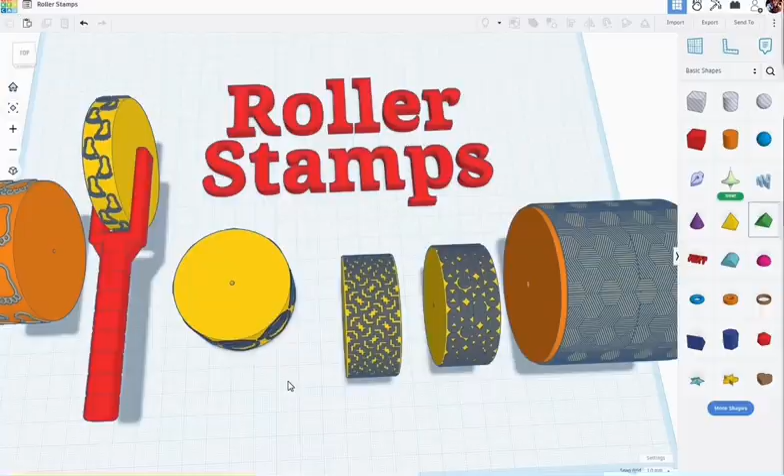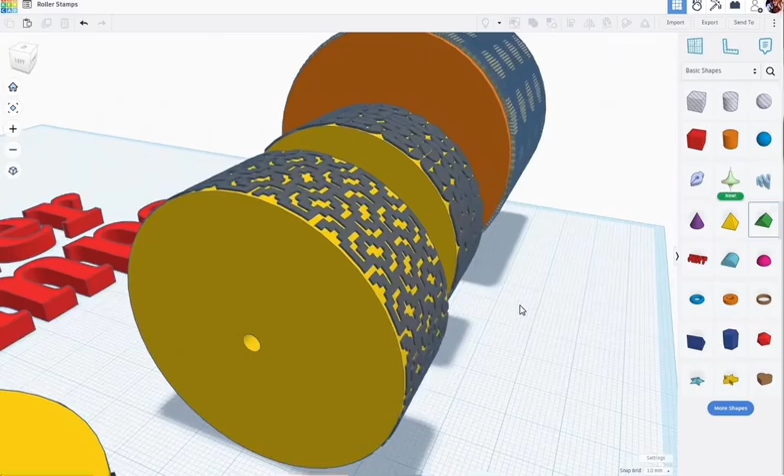This is part 3 in my roller stamps tutorials. In the prior two tutorials, I showed you how to make these roller stamps using simple images from Google, like footprints and Santa. But I said I'd also show you how to do these seamless type images, so let's get started on that.

Let's close this one and open up a clean workspace so it's a little easier to do this in TinkerCAD. On my workspace here, I'm going to click on Create, 3D Design. We'll open up a new workspace. Here we have it. Now let's jump over to Google.

One thing to note on this type of roller stamp design is that we want to work with images that are considered seamless, meaning if you put it edge to edge or top to bottom, everything will line up. It's also a good idea to pick an image with more straight lines and squares, not so much circles. If you've worked with TinkerCAD before, you'll know the more faces or facets in the mesh, the more difficult it is for TinkerCAD to render or group our projects.

So I found this one here - I went to Google, put in seamless textured clip art, black and white, and found this great image. I'm going to right click on it, say Save Image As. It's an SVG, and I'll save it back to my PC.

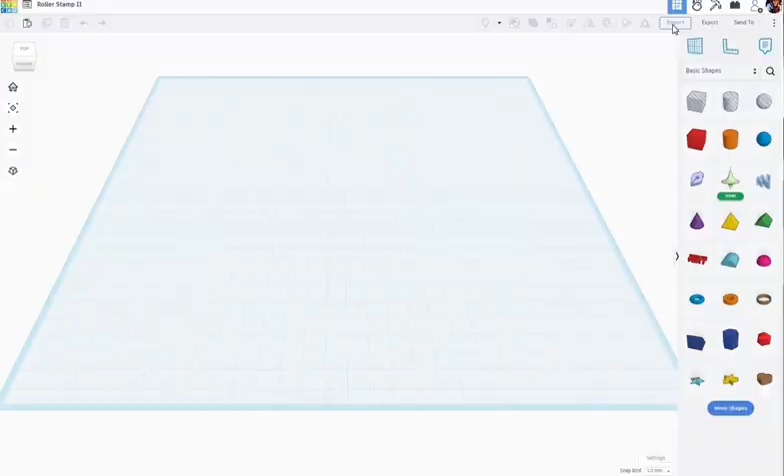Click on Save. Let's jump back to TinkerCAD here. Now let's give our project a name - let's call this Roller Stamp 2. I'm going to click on Import, choose a file. There's our SVG. I'll click on Open.

I'm going to select Art. Now this is pretty huge, so I'll go ahead and scale this down to just 10%. Click on Import, we'll give that a moment to bring it in, and when it comes in, it's going to look like this.

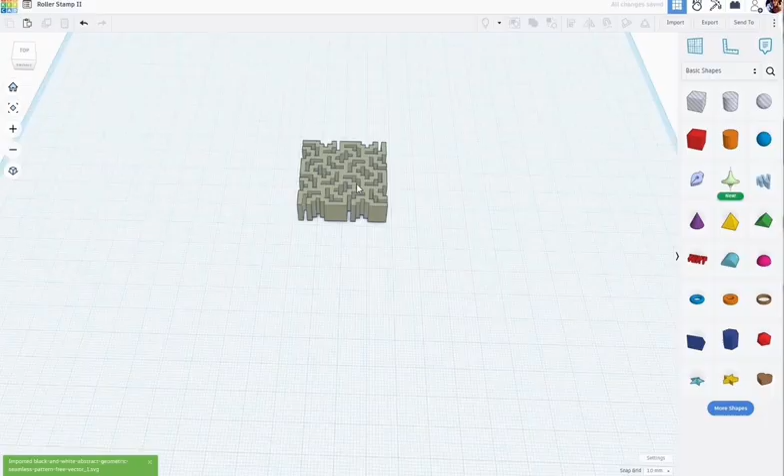Let's go ahead and change the color of this - let's make it a gray color here. Now I'm going to hold down my Shift key and roll this over this way, and I'm also going to rotate it this direction. D to drop it to the work plane.

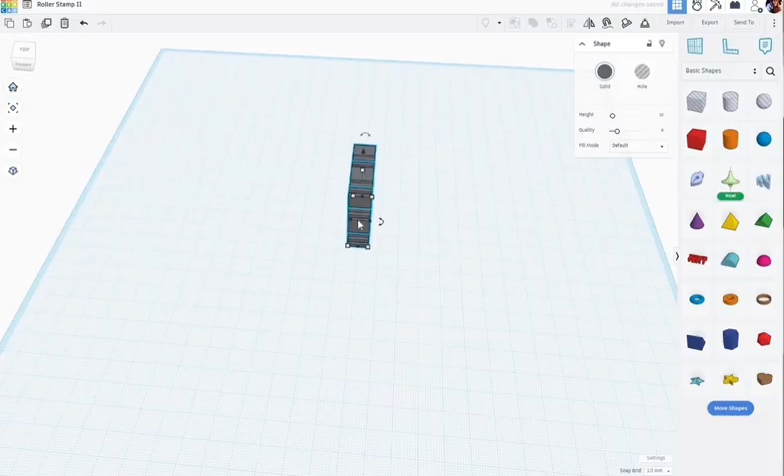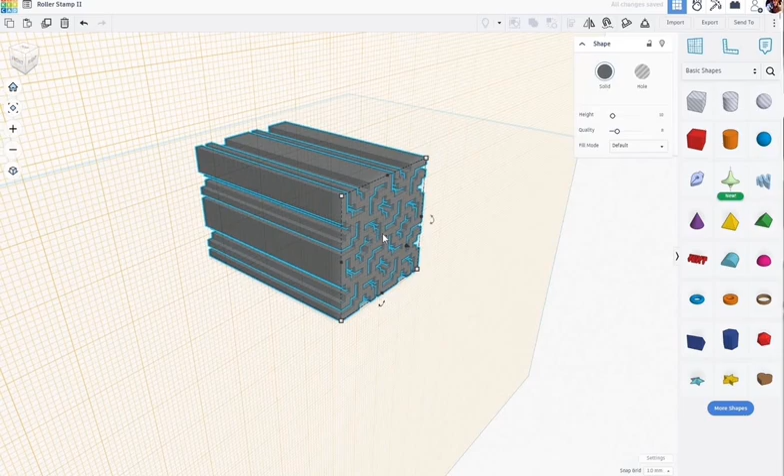Now I'm going to stretch this out a bit, let's say to about there. None of this has to be exact just yet. While that's still selected, we're going to duplicate it, Control D. I'll hit W on the keyboard for work plane, and place that work plane on this right edge. D to drop that, I'll zoom out, then W to get our work plane tool and put it back on the default.

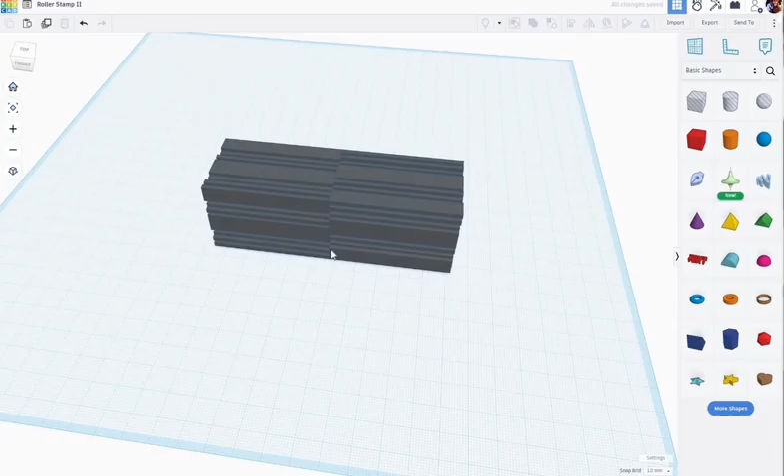Now it's important that on the one we just created, we rotate this 180 degrees. So again, I'll hold the Shift key, grab this rotation handle, and rotate that 180 degrees. Now I'm going to select both of those and group those together with Control G.

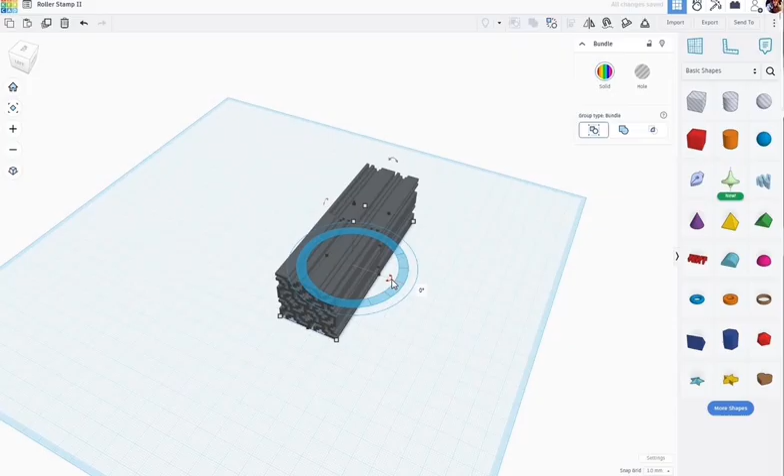Okay, I'm going to zoom out a bit here. Now we need to create some rotations of this. While I have that selected, I'm going to hit Control D to duplicate, and click on the rotation handle to rotate it 45 degrees. It's important that at the ends of these we want a little bit of a gap, which will be important in a moment. While that's still selected, I'm going to hit Control D again, and one more time.

This is called wave duplication. I've talked about this before. All right, I'm going to select all of those and bundle group them together. Select all of those, Control V.

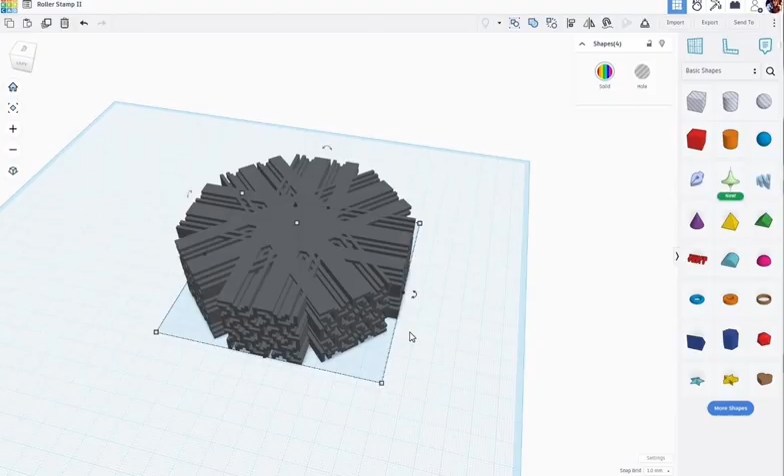All right, now that we have those bundle grouped, now we need to bring out a cylinder. Let's make it a little bit taller. Let's align the two of these.

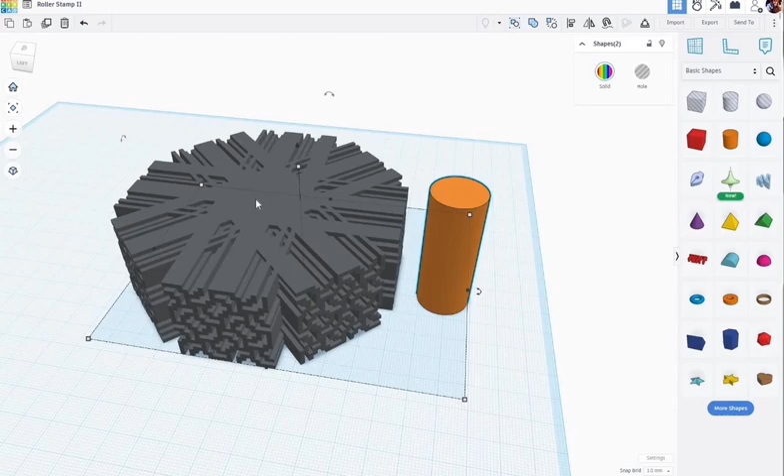Now, again, it's also important here because of some of the limitations of TinkerCAD, we don't necessarily want to increase the number of sides here. So while I have that selected, I'm going to Shift select our images. I'm going to hit L on the keyboard for align, or I could click on this up here. I'm going to click on our images to make it the master so it doesn't move. We're going to align that direction and that direction so our cylinder is centered.

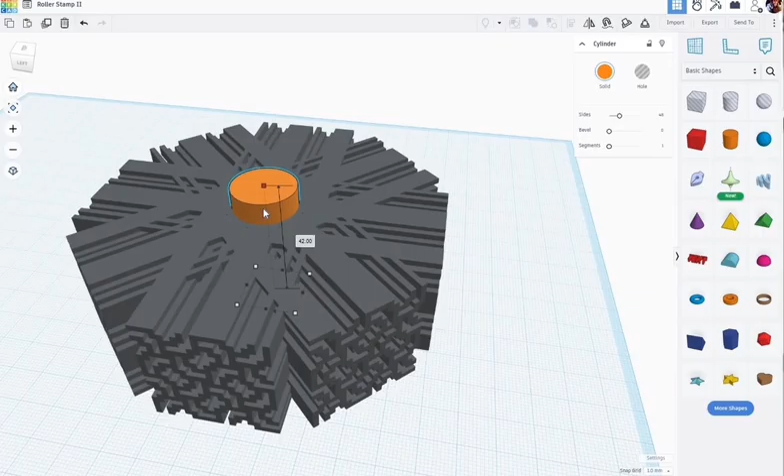Now, for the moment, I'm going to bring the size of this down, the height of it. Over here in the settings, I need to change our snap grid to off. We want to have a little bit of control here, and let me show you why.

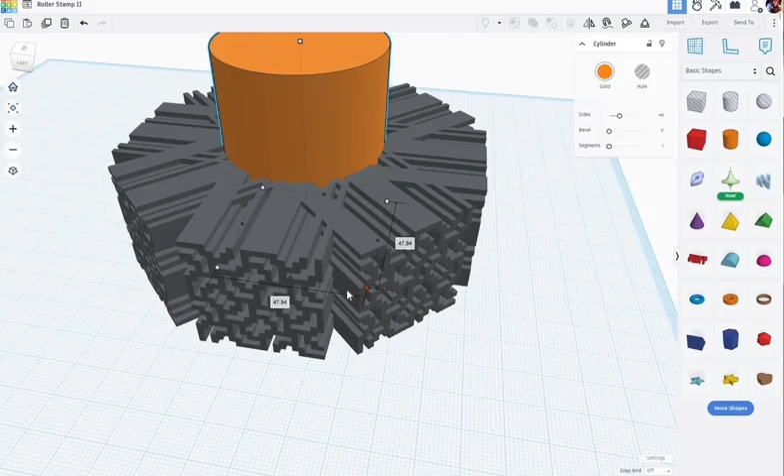I'm going to zoom out just a little bit here. I'm going to hold Alt and Shift, and grab this bottom corner, and begin enlarging it. As I do that, I also want to bring the height down. Alt and Shift and bring it out again. Bring the height down.

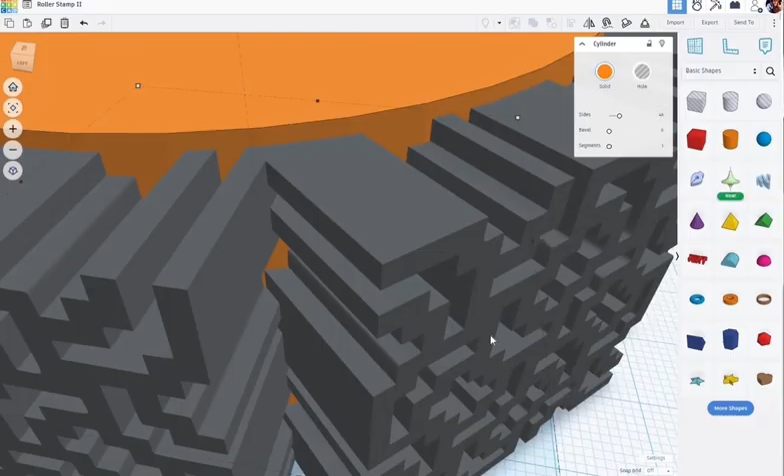Now what we need to do is bring the cylinder out to where it just meets the intersection between these images. Let me show you what I mean by that. Zoom out a little bit here. Alt and Shift again, I'm going to come out, out, out. Oh, just about there. Right about there. You can see our cylinder meets right at that intersection between the two images.

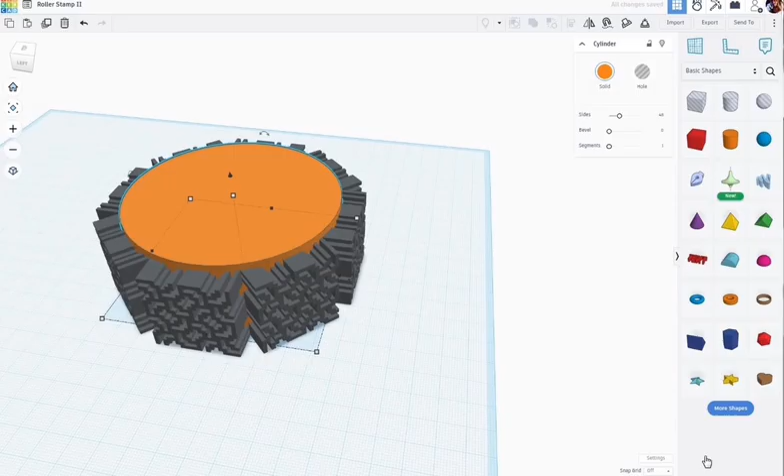Okay, for the moment, I'm going to make a duplicate of this cylinder, Control D. Going to set our snap grid back to 1 millimeter, and I'm going to Shift nudge this over. Now this one over here, I'm going to hide it with Control H. Now this cylinder over here, I'm going to turn into a hole shape.

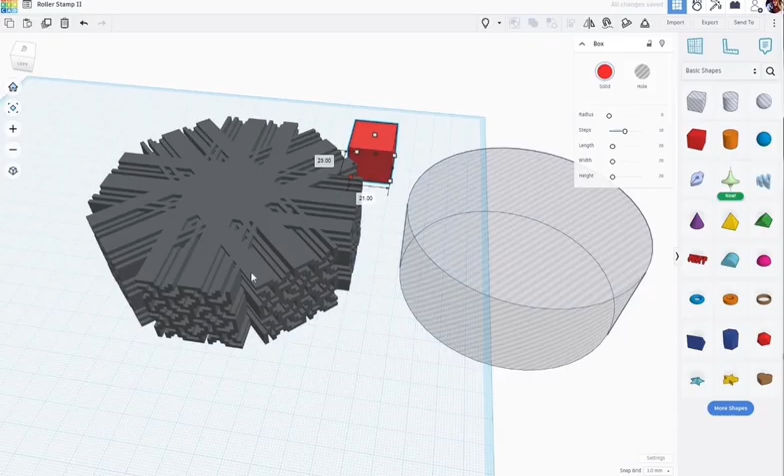Now let's bring out a cube here. We're going to make ourselves a little cookie cutter sort of object here. I want to make sure that it's bigger than our pattern. Size isn't important as long as it's bigger than our images.

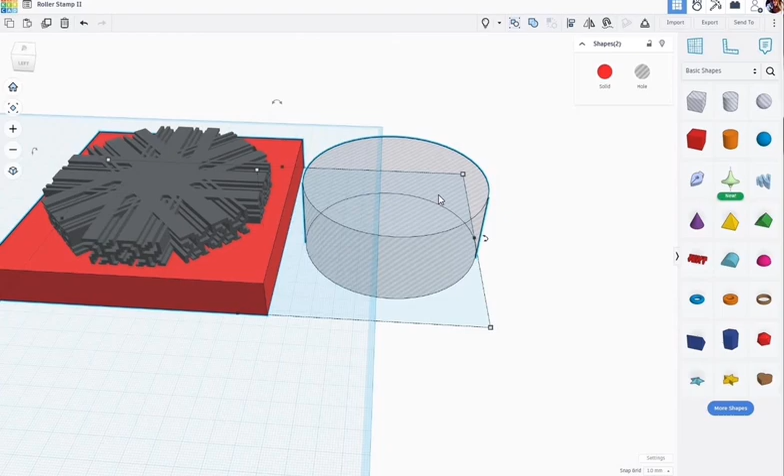While that square is selected, I'm going to Shift select the cylinder. L for align. I'm going to click on the cylinder to make it the master. Going to align that direction, the center that way, down the center here. I'm going to select the cylinder and the square, and Control G group those together.

All right, we're at about 9 minutes here, so I'm going to go ahead and stop here. We're going to continue this in what's going to be part 4 of this tutorial.